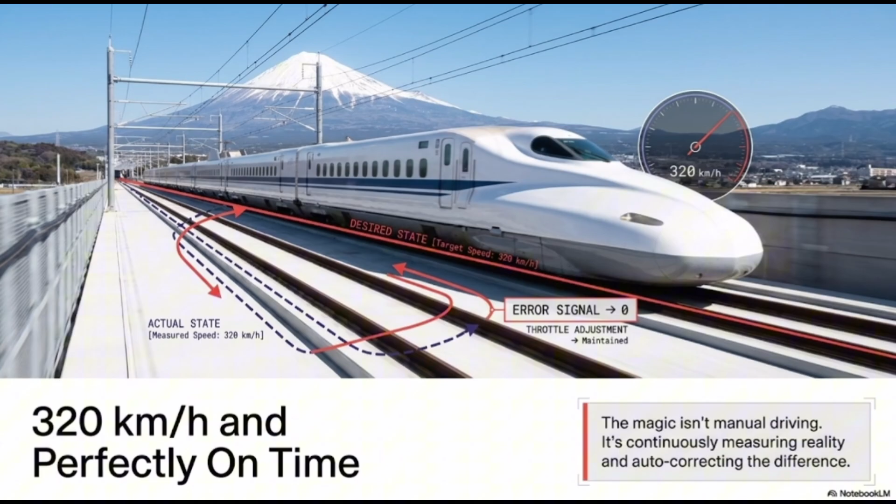It's continuously measuring reality and auto-correcting the difference. What does that mean? It means that when you're talking about the bullet train, the distance, the speed - everything is related to control, not just normal control. It's a closed loop feedback control, meaning everything is automated. The human operator is there, but they can't really control anything. Imagine you face some issue and the human can't act fast enough - at this point you need a closed loop controller. You need automation to make sure your train can go around 320 kilometers per hour. By the way, that is a very, very high speed, and it has near perfection on almost everything.

Another thing that caught my eye was robotics, because as you all know, robotics and AI are trying to devour our day-to-day life. But the important thing is how they actually work.

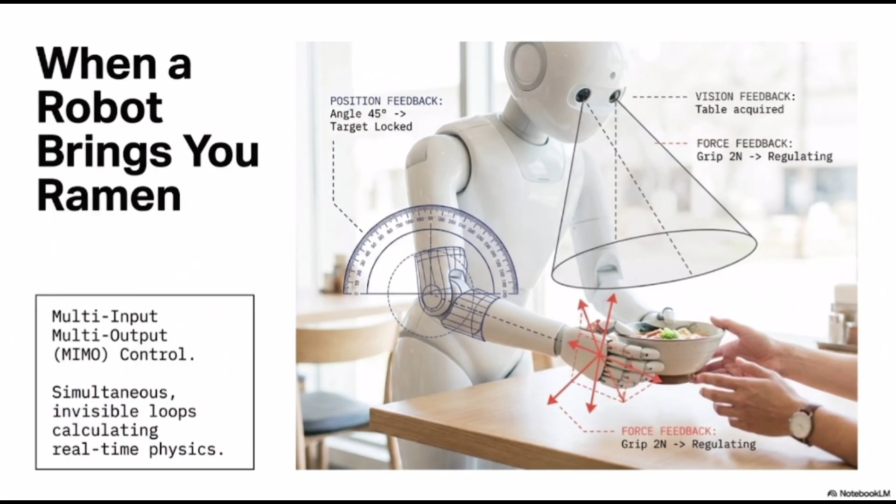They are going to see what's going on in your hand at a perfect angle, and the vision acts as feedback for all the forces and how they actually work. They have something called MIMO, multi-input multi-output control, with invisible loops calculating real-time physics. So everything is happening using the closed control loop.

Another thing I really liked about Japan was the vending machines. Every time we were out trying to get drinks or food, we used vending machines, because even though there were grocery stores, they weren't there all the time. So we used these instead.

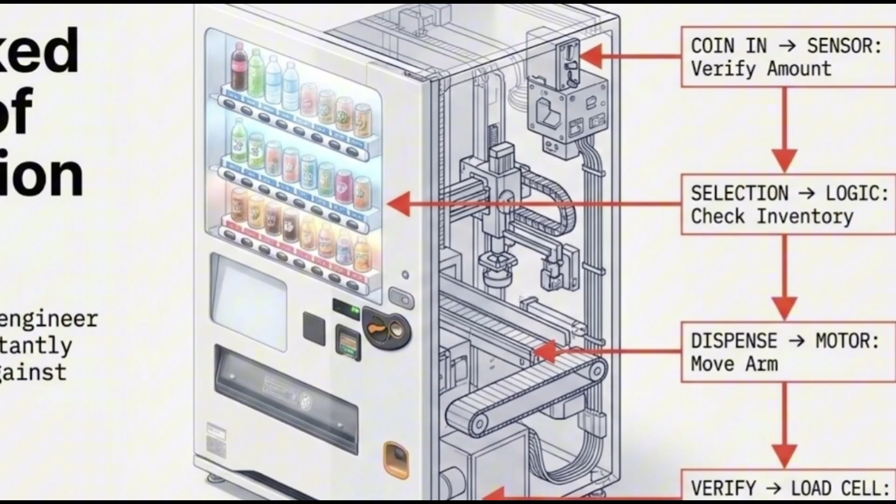So how do they actually work? It's simple, just like the vending machines we know. You select some kind of product, then you put coins inside, and when you have the coin in, there's a sensor. This coin is, for example, worth 1,000 yen, so the machine has to make sure you've passed exactly 1,000 yen. Otherwise it wouldn't make any sense, right?

For instance, you want a drink that's around 1,000 yen, but you pay 800 yen and the machine misinterprets it and gives you the drink anyway. That obviously doesn't make sense, there's no profit. So it's very important to have the right sensor that verifies the amounts.

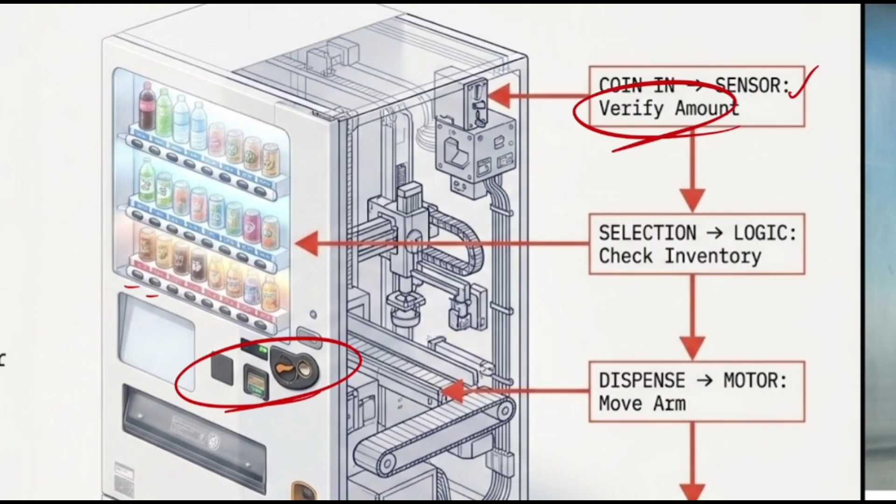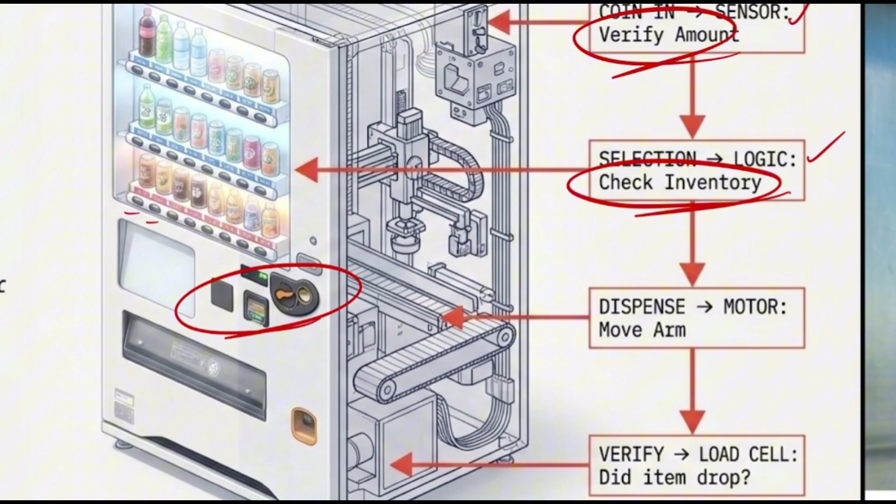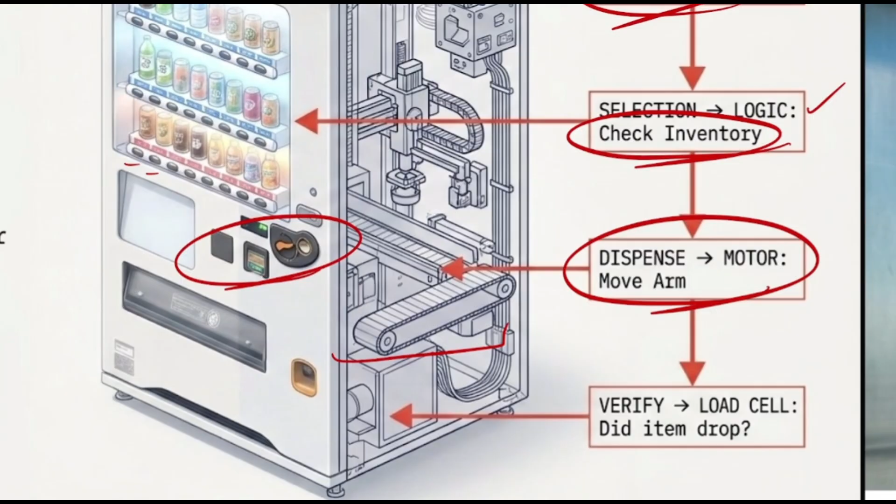Then there's the selection — you pass 1,000 yen, so you have to make a selection. But it's not only about your selection; the vending machine should also check the inventory to see if it has that specific drink you want. Then there's the motor itself, a moving arm — the robotic part goes to the inventory, grabs the item you want, and finally drops it for you to grab.

So all of this happens because of the miracle of automation. It's not that big a deal really, it's a tiny control engineering system, just a metal box. But the important thing is it's constantly verifying reality against the user's command.

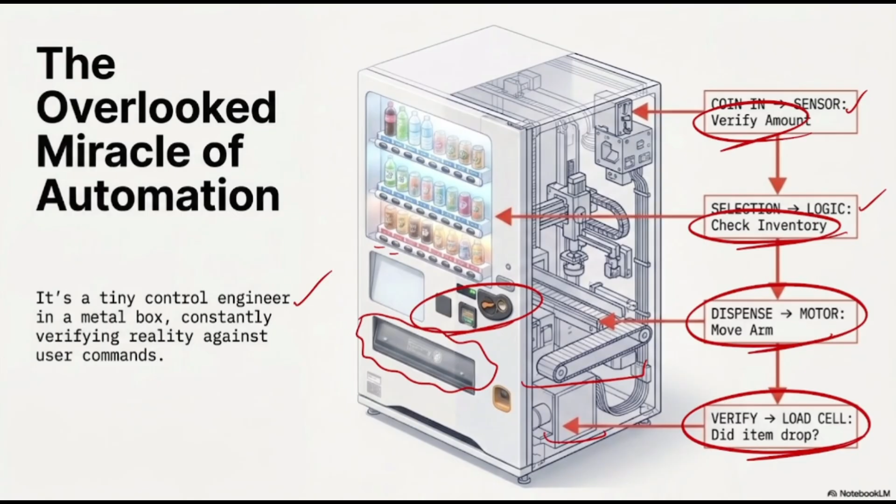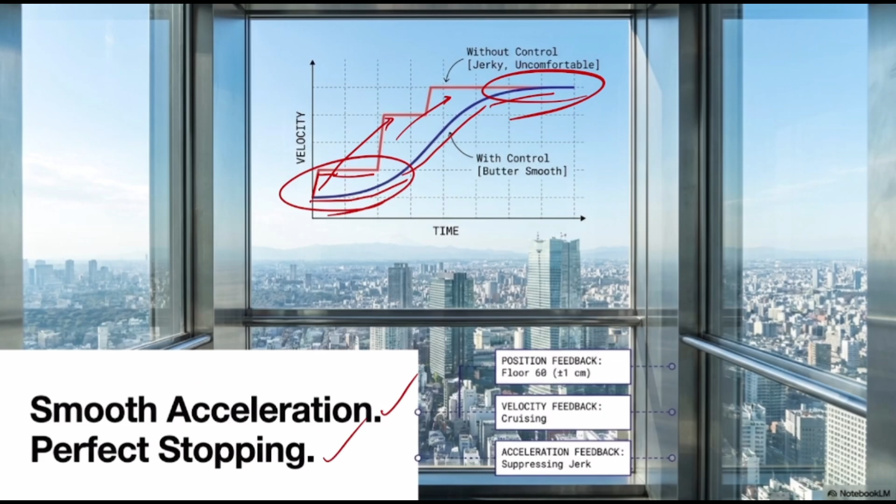It's also very important because we have tall buildings and skyscrapers in Japan and elsewhere — it needs to be smooth and also fast. For instance, if you have 50 levels and want to go from the first to the 50th, if it's not fast and smooth, either you won't reach the level you want, or you'll feel nauseous.

One very interesting thing was about Shibuya. The Shibuya crosswalk is the biggest crosswalk in the world, and every day thousands and thousands of people pass through it — it's a touristic area, to be honest. There are different sensors placed in these crosswalks, and what these sensors do is detect the crowd volume, and based on that logic, give adaptive timing.

So the output is going to be the green wave, and we do have the length reduced at some points because you have a massive number of people. So the green light should be a little bit more, about the timing. At some point, when you don't have that many people, the green light should be a little bit less.

This is another perfect example of closed loop control systems. So what is happening? What is the universal engine? We can use it in different kinds of settings and different kinds of works, but they actually follow a simple rule. First of all, they measure the thing that's actually there. For example, the sensor part measures the weight of the people. Based on that, it can decide how many people are going to pass the crosswalk, and then compare it with the actual settings that are set based on human sources.

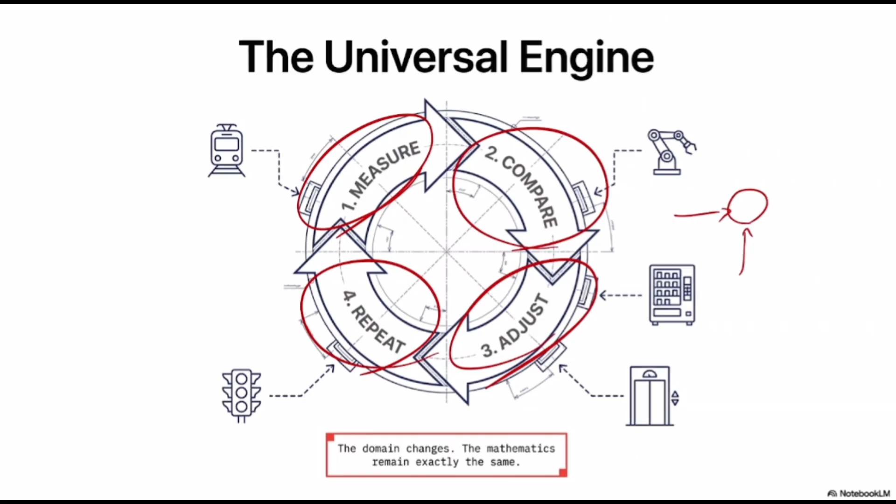So the core problem happening around us is that the world is uncertain. It means that you have wind, weight changes, and anything else, but on the other hand, you need something to make sure that everything is adjusted. So it means you need a feedback control. That's why it is very important.

Next, we're going to talk about two different types of controllers: one is open loop, and another one is closed loop. That's the reason why we need feedback more than the open loop one, since it's going to increase the complexity and everything related to that. But at this point, we would like to know how precise we can be.

Real systems are completely unpredictable—well, I cannot say completely unpredictable, but unpredictable. Feedback removes the need to know everything in advance. If you don't have any feedback controller, you have to predict everything beforehand and consider all the scenarios for your machine. Obviously, you cannot predict everything, especially when dealing with uncertainty every day, like renewable energies or wind speed. That's why you have the feedback control loop.

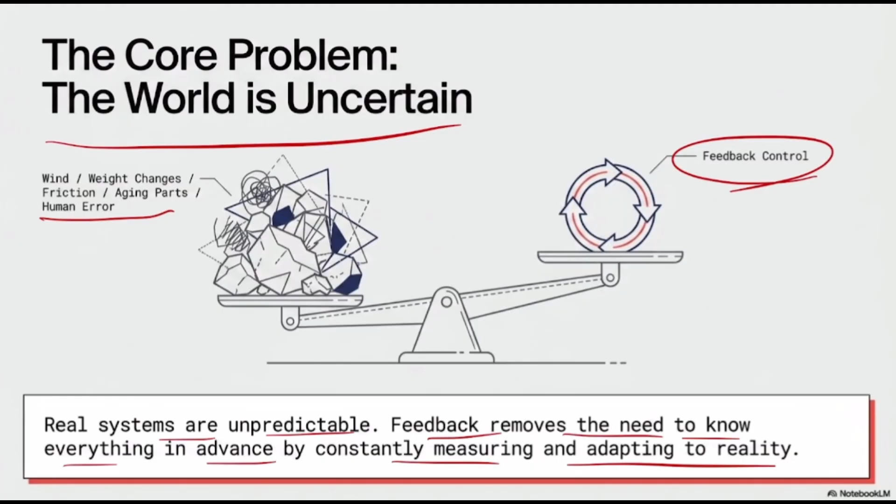So by constantly measuring and adapting to reality, we can make sure we set it to the result that we want, and finally we can have it. This is a very important part, and it's going to play a big role in the control section. We have two different types of controllers. The very first one is the open loop controller.

What does that mean? You have a set point that you put for yourself, and after that you have the controller, the actuator—the basic foundation of any controller system. After that, your output is your temperature, imagine that. But the issue is that you put the input as the number you like, the temperature you desired, and your machine is going to do something. The problem is that your machine is completely blind.

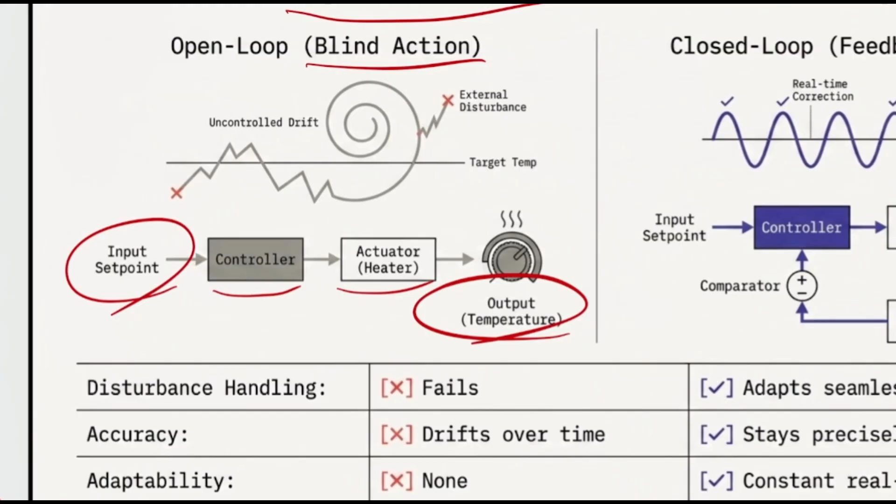It's going to do something and hope that it's going to work out. But as a human, you see that's not what you like—for example, you set a specific temperature, and then the room gets hotter, so you say, okay, I have to decrease it. Actually, you are acting as the closed loop controller, working as a feedback, but the machine itself doesn't have any sense of what's going on in the outside world. This is a very big issue, and obviously you don't like that.

When we are talking about the closed loop controller, when we are talking about the feedback controller, we say that we have everything that we need.

We do have the input set point, but at this part, other than just a controller and actuator itself, we do have the sensor and we do have the comparator.

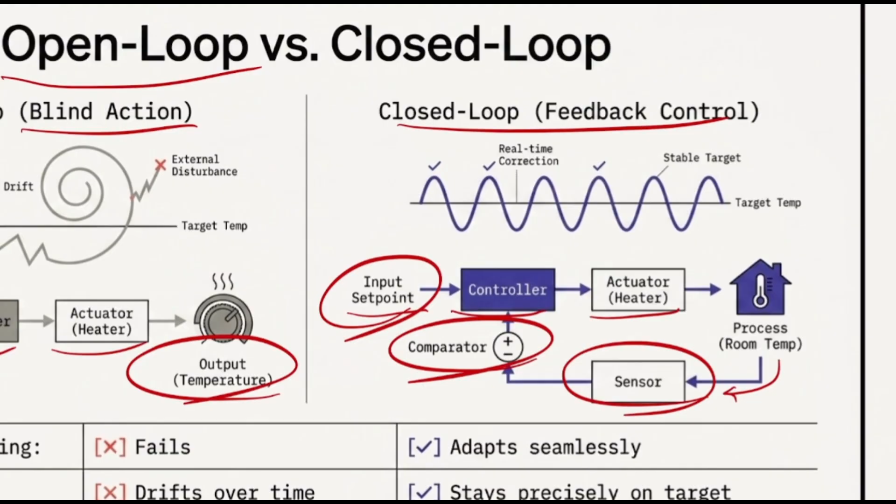The sensor is going to sense the outside world and give eyes and ears to your machine. Then this is compared with the input set point, because it would like to see, okay, am I doing it right? How far is my distance from the current situation and the situation it would like to reach? Based on that, we can make sure everything works seamlessly.

We are going to be precisely on target, and we do have the constant real-time correction. Other than that, if any disturbance happens, we cannot handle it in the open loop, and accuracy is not that good, and adaptability is not that good either.

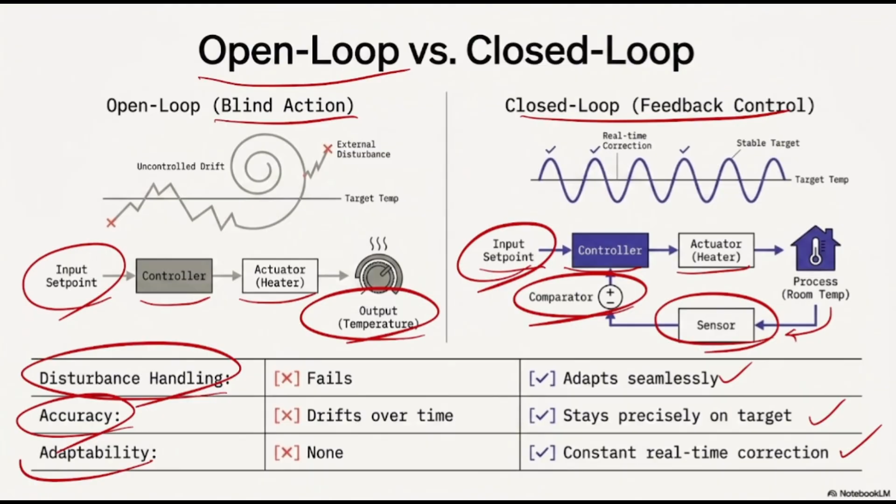So engineering in the modern civilization is not just about the crosswalk, the vending machine, it's about the robot, it's about anything. When you're talking about aerospace, those kinds of projects, you have to make sure everything happens flawlessly, rather than everything collapsing.

When you're talking about healthcare, these days we use more and more robotics, so it is very important that we have precise controllers that can deal with the fact that we are going to save lives. We cannot just say doctors can do anything by themselves. These days we use robotics, but we have to make sure everything happens precisely, based on adaptability, and happens seamlessly.

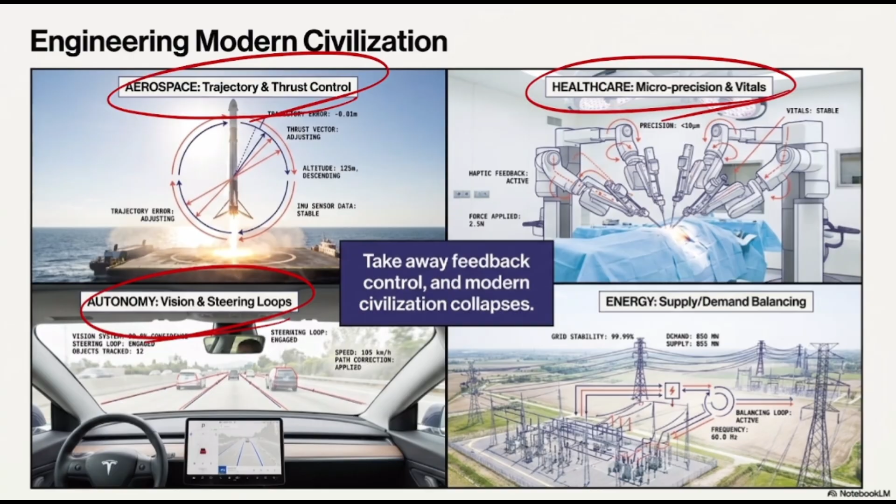And we are talking about electrical vehicles, or autonomous driving, like Tesla. We have to make sure everything happens seamlessly based on the sensors on the front side, on the windshield, and we get feedback, and based on that, the Tesla adapts itself.

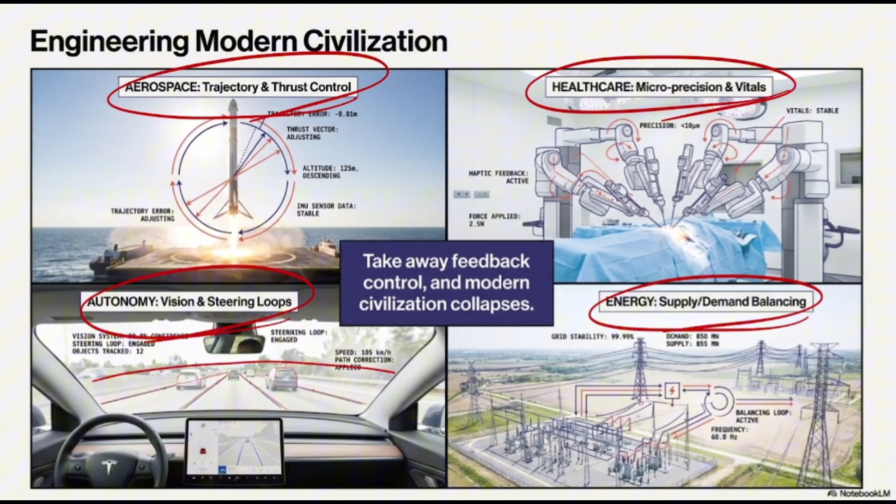And finally, we are talking about energy, about supply and demand balancing, which plays a very important role in our day-to-day life, especially in electrical engineering.

So about the engineering skill tree: first of all, we have to understand. We have to decode the system around ourselves to see what's going on. Then we have to model that, translate the physical reality into mathematical equations, which we will see in the future. We have to analyze it, predict the system behavior before it's actually built.

Then we have to design. We have to do some designing for ourselves based on the controller, based on everything we have. And finally, we have the implementation. This doesn't just end at implementation, because we have repetition — we have to modify, we have to adjust everything. So that is the cool part.

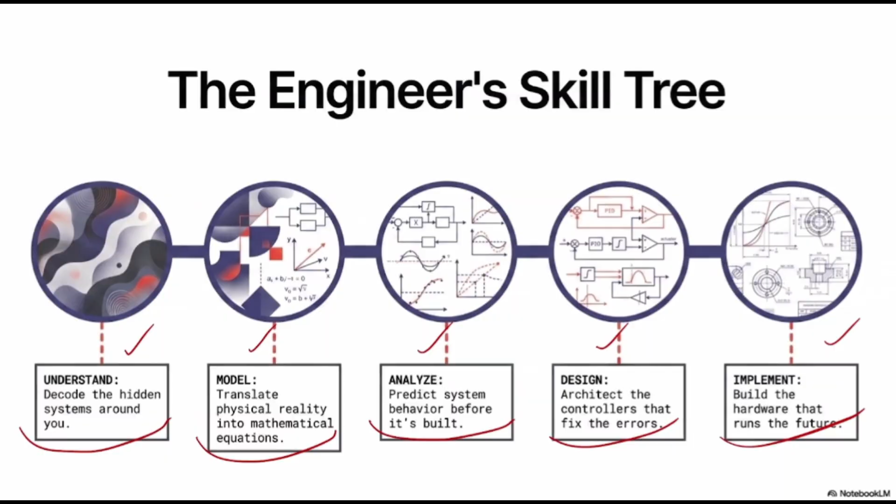And finally, welcome to the club, because the story wasn't just about Japan. The story is about a course named Control Systems. In this course, we are going to deal with everything from understanding, to mathematics, to designing, implementation, and repetition.

Let me give you a brief introduction about this. I would be more than happy to have you with me. So probably in the next couple of videos, I'm trying to make them a little faster, because in the past few days I was in Japan. I was just enjoying it, it's fascinating, it's once in a lifetime. But in the upcoming videos and days, I would like to make more and more videos, especially about control systems.

So far, we talked about mathematics, we talked about electrical circuits, but it is a very good point, because right now we have enough knowledge about both of them to actually use them in real time.